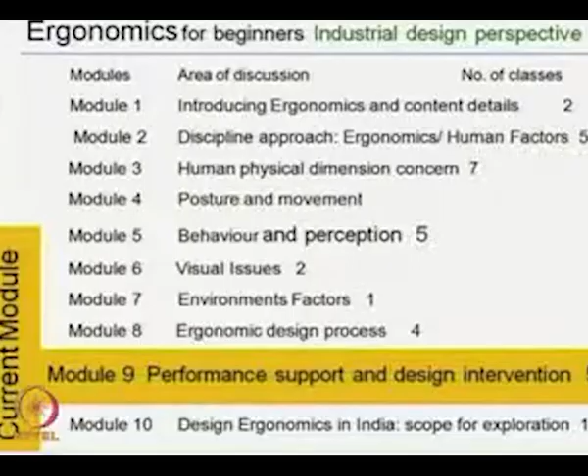Welcome to this 38th session of Ergonomics for Beginners, Industrial Design Perspective. The current module is module 9, Performance Support and Design Intervention, for 5 sessions total. Today's session, class 38, covers vertical arm reach and relevant design application possibilities for the workstation craft sector.

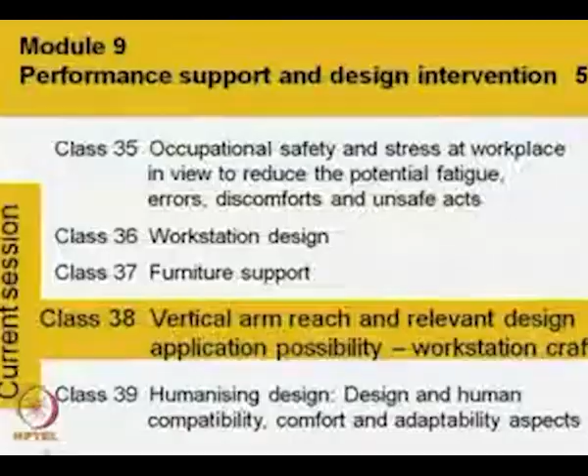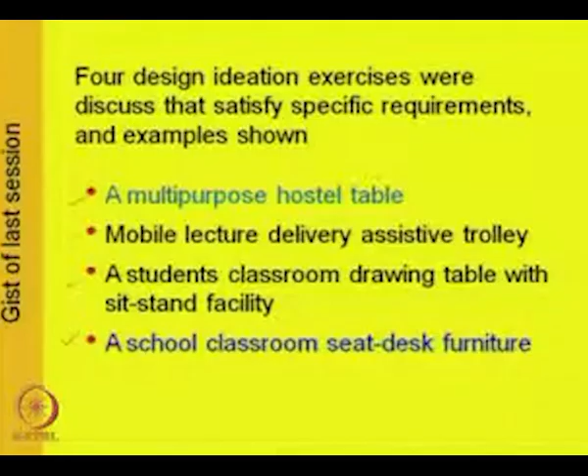Gist of the last session: we discussed 4 design ideation exercises that satisfy specific requirements, with examples shown as a multipurpose hostel table, a mobile lecture delivery assistive trolley, a student's classroom drawing table with sit-stand facility, and a school classroom seat desk furniture design.

In summary, the design development attempt must have proper need identification followed by design ideation exercise and incorporation of context specific human compatibility and comfort issues. Similar to the concepts discussed in class 37, relevant need-based and anticipated need-based design ideation exercises may be initiated to meet our varied nature of requirements.

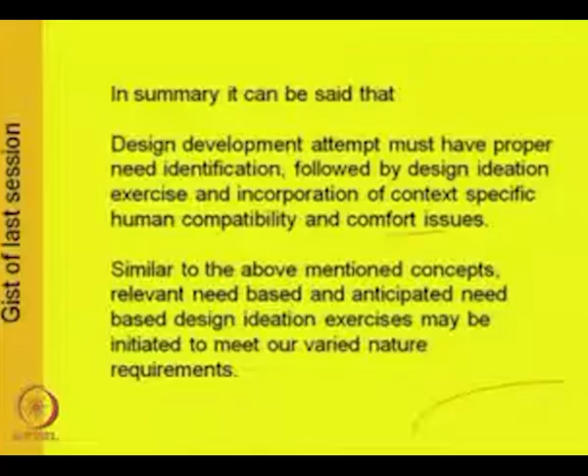With this background, today's session, class number 38, we are going to discuss vertical arm reach and relevant design application possibilities, and ergonomic workstation for the craft sector. We are going to discuss this area of brass metal activities.

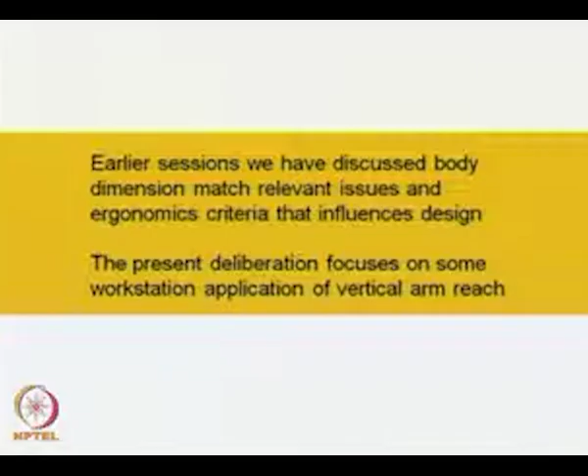In earlier sessions, we have discussed body dimension match relevant issues and ergonomics criteria that influence design. The present deliberation focuses on some workstation applications of vertical arm reach.

So today's discussion we are dividing into 2 groups. The first part is vertical arm reach related, and the second is a workstation for brass metal craft.

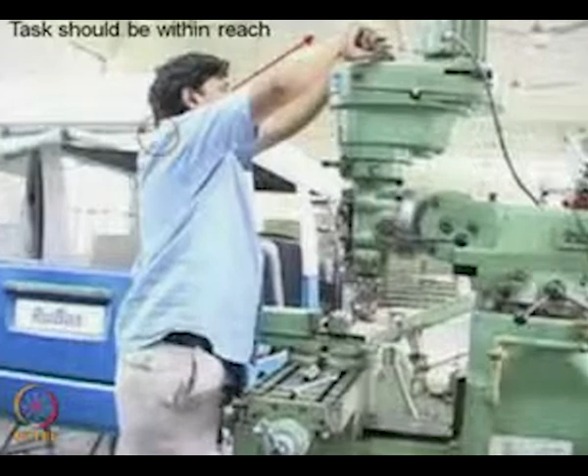In earlier sessions we discussed arm reach values. Now we are giving a recollection of those issues. In this figure, in a machine work condition, the task should be within arm reach. Normally it is said that if this is within a 150 degree angle, one can perform skillful activity. So it would be better to keep all the controls of the machine, or wherever you need to touch, maybe the upper shelf etc., within that limit.

So what can be done here? Either provide some support so the person can raise up, or design something so that these books etc. will be within easy reach.

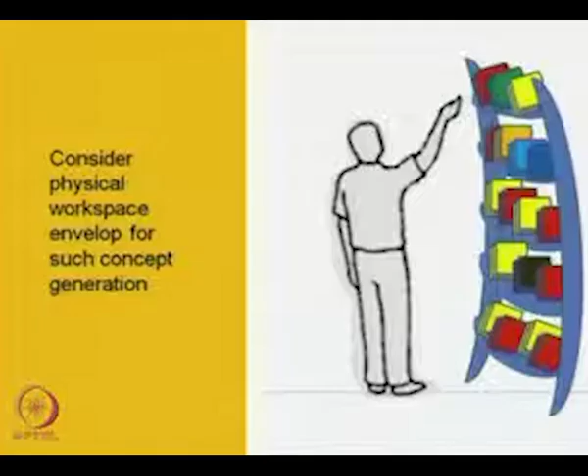Earlier we discussed the arm space envelope, the total arm arc, and the vision arc. With that, this type of rack design is possible, where the total surface area will have a curved appearance and the topmost point will be within arm reach. So consider the physical workspace envelope for such concept generation.

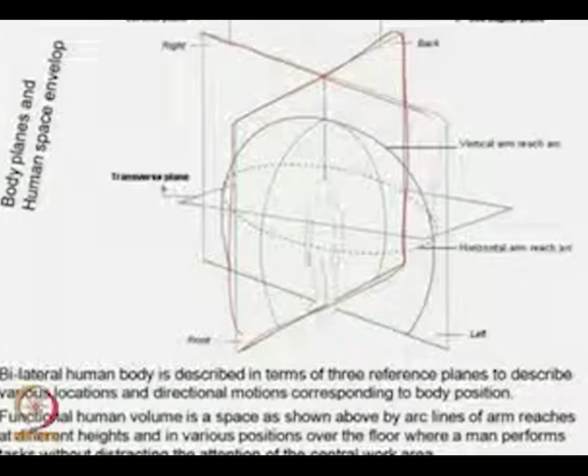Then what is the human body envelope, workspace envelope? If a person stands here, this is the vertebral main axis, central axis. If we make 3 different planes - right side and left side, then back and front, and a transverse section covering upper and lower portions - all these arcs are the arm arcs.

This means when we raise and extend our arm, this is the total arm arc at different heights. The bilateral human body is described in terms of 3 reference planes to describe various locations and directional motions corresponding to body position. Functional human volume is a space shown by arc lines of arm reaches at different heights and various positions over the floor, where a man performs tasks without distracting the attention of the central work area.

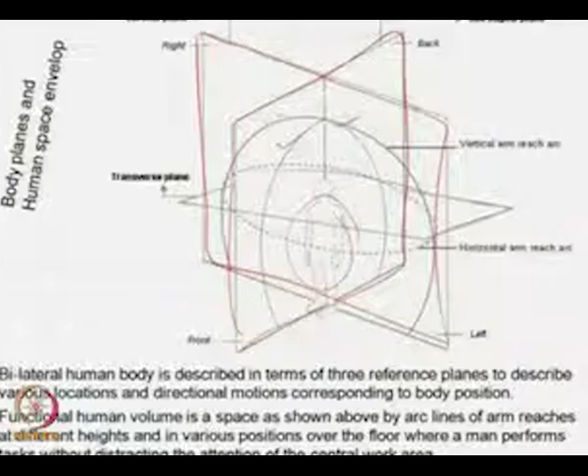Some examples: height fixing the top platform requiring easy reach height, and here it should not be the full vertical arm reach. Now, for the total workspace, the bending space, height, reach, lower reach, etc. has to be considered.

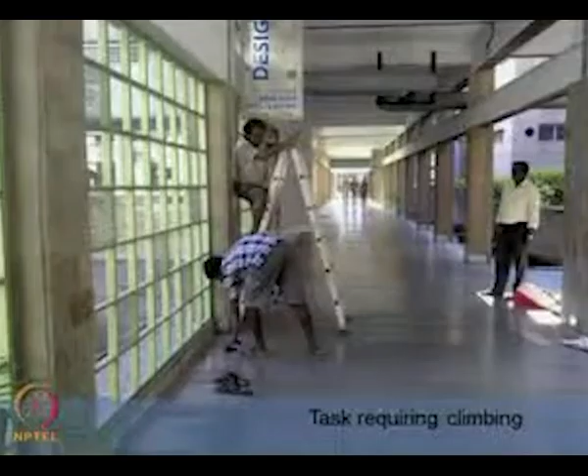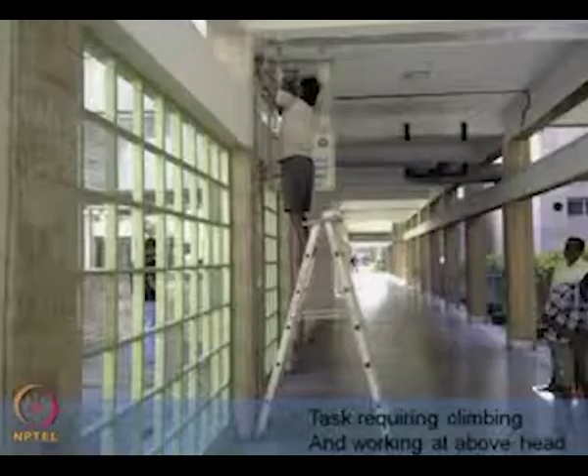Not all tasks are performed on a ground level. Sometimes the task requires climbing, and after climbing, working at the above head level. So at this position, what will be the controllable upper arm reach?

If the arm is extended beyond around 150 degree angle normally, then some additional stress appears. So either you increase the support system, or you decrease the working point, or have a design in such a way that the task can be performed nicely.

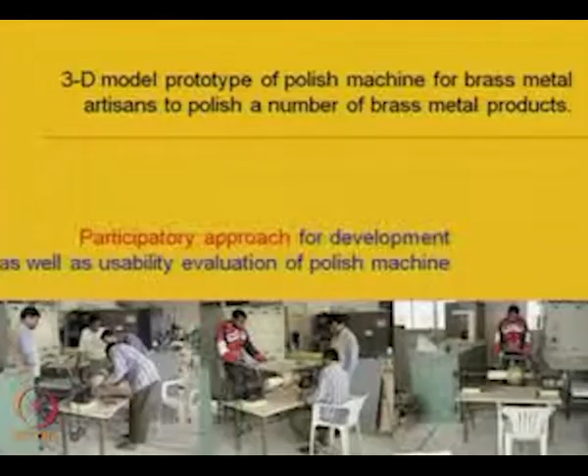After fixing, their trials were also given. This is the actual product, the workstation that was developed, meaning a higher platform. One side has a cycling facility, where one can adjust its height and angle. This is the handle.

So there is this, and here the main brass metal may be placed here, and a motor was provided here. If power is there, then through the motor this shaft can rotate, and only one person can polish the machine from this side.

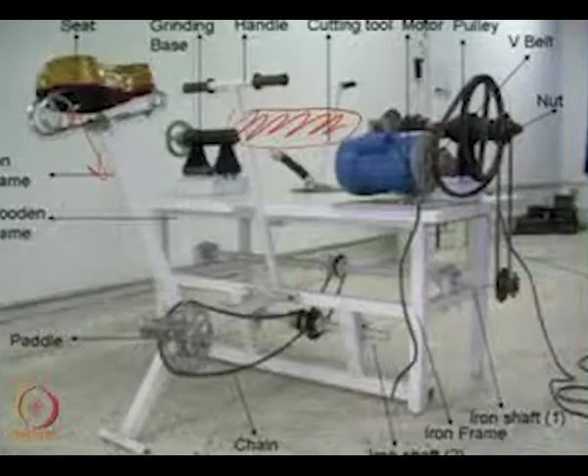When power is not available, mostly what happens, why was this thing done? Because craft section areas are normally in the outskirts of the city area, so the electricity availability is not always good. So in that case, both manual and electrical facilities are provided.

From the opposite side, the person can use a chair kind of thing here, any kind of chair he can use to sit and work. We do not need to squat always, and here a special guided knife holder, a cutter holder, is given, so that after holding it he can operate with this thing.

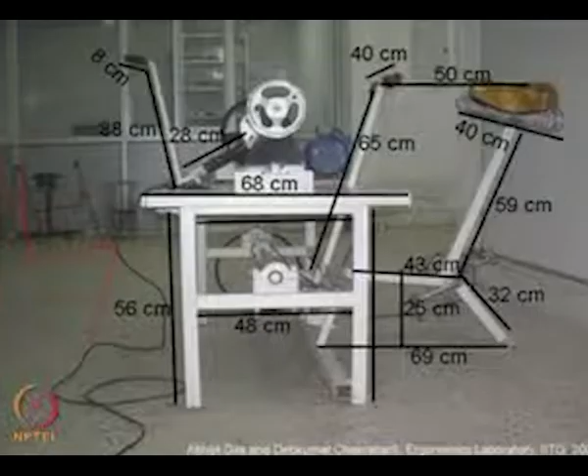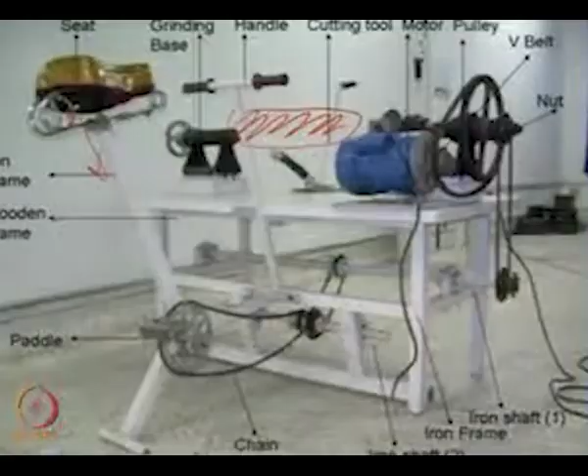In earlier sessions, while working on the floor, at that moment while cutting, the arm remains in a suspended position, which puts a pressure load on the body. Here, a holder is provided, so arm support is there, and with arm support one hand can move like this, so wherever the cutter is necessary it can cut. So it is a holder, a support system being used here.

Now this new workstation's features are: elevated work surface, automatic and manual power both, increased productivity and comfort, and free postural facility.

We gave this product to the artisans, they kept it for almost 6 months, and then we got their feedback. It says it increases around 75% of productivity, by counting the products polished, and gives free postural facility, meaning they can sit or stand, the person holding the knife, and when power is there a single person can work, so we do not need to cycle to move that shaft.

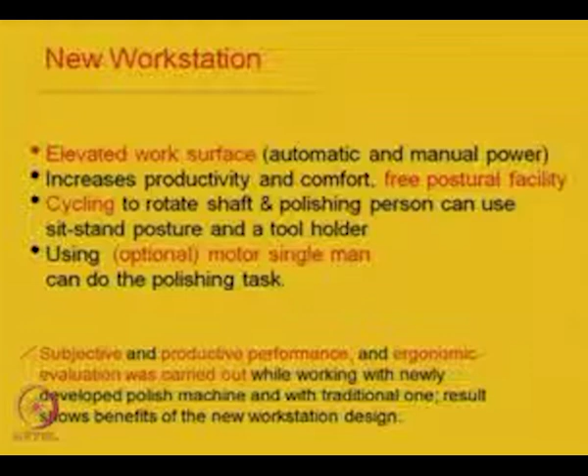So there is free postural change facility: the cycling to rotate the shaft and the polishing person can use a sit-stand posture with a tool holder. Using the optional motor, a single man can do the polishing task. Subjective and productive performance, by counting the number of polished material, and ergonomic evaluation was carried out while working with the newly developed polish machine versus the traditional one, sitting on the floor. Results show benefits of the new workstation design. Subjective means asking them questionnaires, and productive performance means counting how many products they can polish. Ergonomic evaluation was done here.

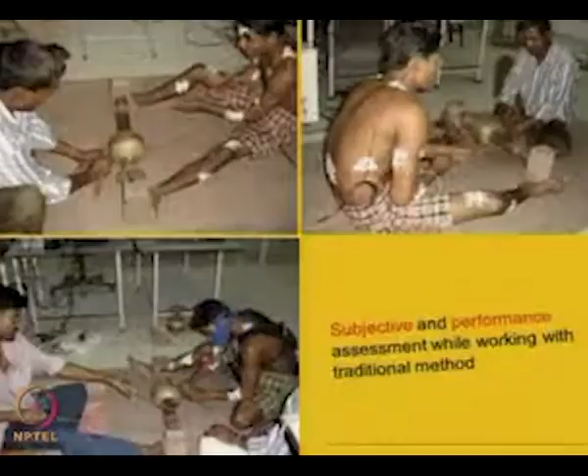Two specific items like that, physiological parameters and electromyography records. Now, while working, after selecting the major muscles relevant to perform this task, electromyography records were taken from the puller as well as the other person using the cutter. We also measured how much energy is being spent for this task using oxygen consumption.

For oxygen consumption, with a mask, the air goes to a digital equipment placed on the back. It gives the result of the oxygen quantity in the normal air, and the oxygen in the exhaled air. From that, the total oxygen being used for this task is found, and from that the energy expenditure is calculated.

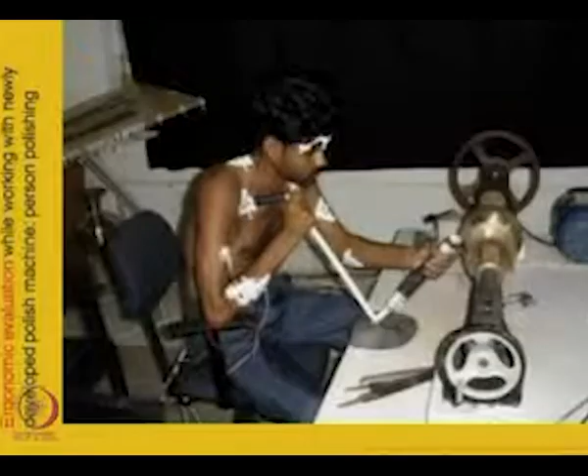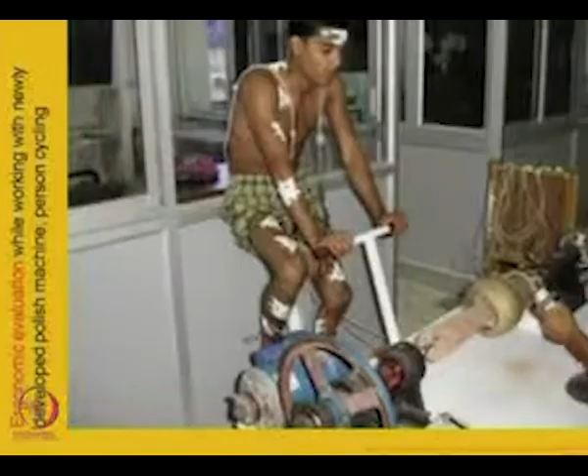So by this way, the energy expenditure and muscle electromyography were taken for this traditional style of working. Then using this new machine, the person with the cutter can hold it, and with the knife holder he can adjust wherever he needs to touch. Here too, the major muscles required were identified, and electromyography and oxygen consumption records were taken for the cycling person as well.

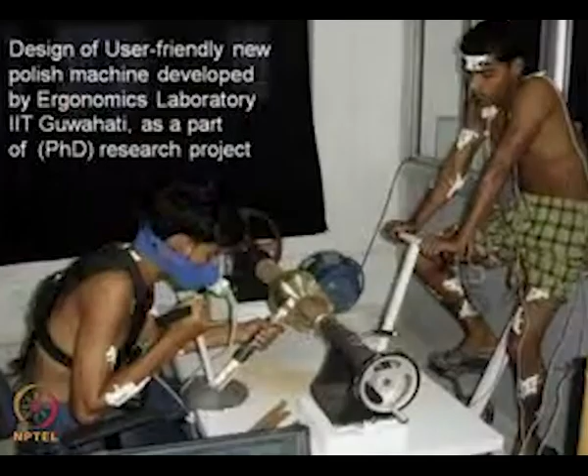So the result - the energy expenditure for a specific time of working on this machine versus the traditional method of working sitting on the floor - the difference shows that this machine gives better performance. This design of a user-friendly new polish machine was developed by the Ergonomics Laboratory, IIT Guwahati, as part of a PhD research project.

So till now, in this workstation development, both persons need to work, but some special facilities have been developed. If power is there, we do not require this second person; only one person can perform the task. When power is not there, then this person may be added.

Now the question comes: why do we require two persons? Can we develop a system for a single person's use? Further work was carried out beyond this earlier development. Then we got influence from the sewing machine. From this sewing machine operation, the idea came, and this product was developed as a further development for single person's use.

Here, we do not require any holder kind of thing, because with this area, from this side or the opposite side, he can put the elbow, and then he can hold the knife and polish it. So that component was reduced.

Now a motor is given here with a special cover and a special speed controller, so that with speed control he can polish at the desired pressure and desired speed as necessary. A cloth cover is given here too, so that while polishing, whatever brass particles fall can be easily collected.

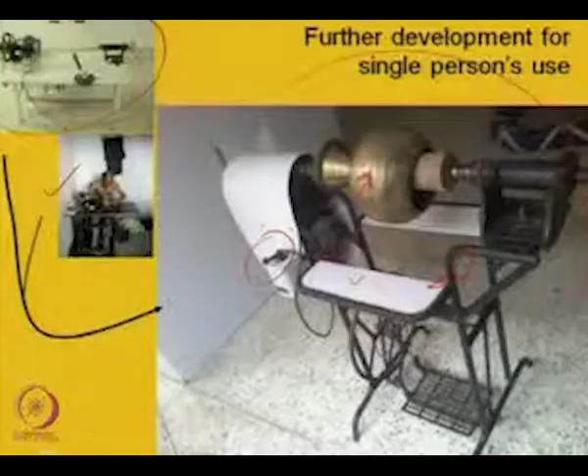When power is not available, power failure, then using a simple sewing-type facility with leg movement, this work can also be continued. So this type of development was done considering single person's use.

Now from another viewpoint, it is seen how the motor is fixed with a chain and the person sitting. Here any kind of tool or chair can be used with this machine.

After this development, it was discussed with the expert group. While demonstrating live, feedback was taken and then final modifications were done. So these are the issues where it is not enough to just develop a product - the design developed must be evaluated to see if the desired effect has been achieved.

So the laboratory facility is necessary. In earlier exercises of workstation design, we mentioned oxygen consumption, electromyography records and others - I mentioned only two, but some others are also considered. So now, what facilities are necessary normally for such type of product evaluation? There are many things, but for a typical ergonomics laboratory, these facilities are necessary.

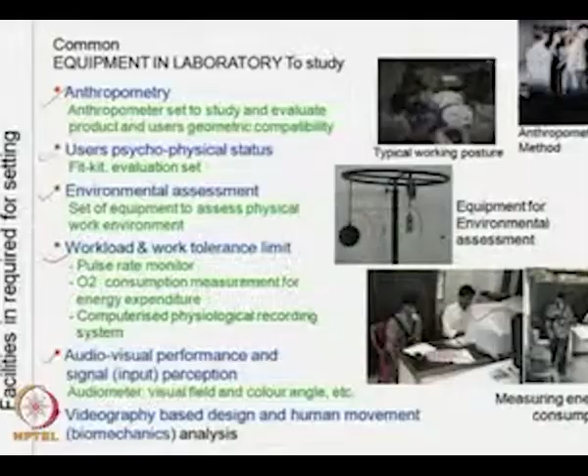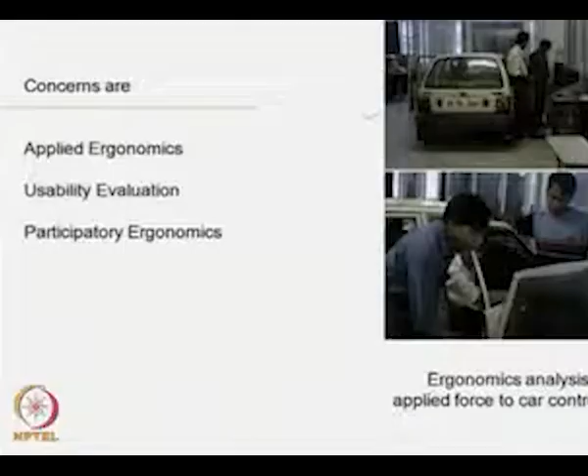While developing this type of design, usability evaluation using videography means when the person is doing the task, if we take videography from different corners and present it on a gridded line or gridded box, one can directly recognize the work posture, etc. Also, this video recording can be analyzed through computer using various softwares.